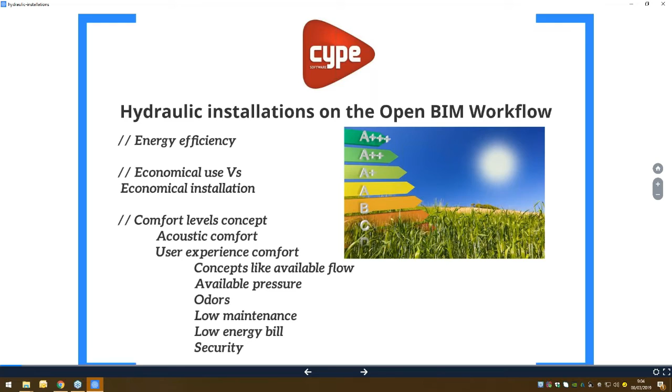CYPE is a Spanish company that has been developing technical software for architects, engineers, and construction professionals for well over 30 years.

The huge variety of programs and the disciplines they encompass are currently in use all over the world, with more than 70,000 users in over 60 countries. Amongst the clients are city councils, technical organizations, universities, and professional offices.

Starting in Europe with a focus in the south, CYPE has more than 40,000 clients in this region. It's very important to mention that the calculation conducted by CYPE software is certified by the governments of these countries, a certification which requires the results of our analysis to meet rigorous standards.

With more than 15,000 clients, CYPE is one of the most used software for structures, building services, and management in Latin America. We have more than 20 distributors selling our software around this region.

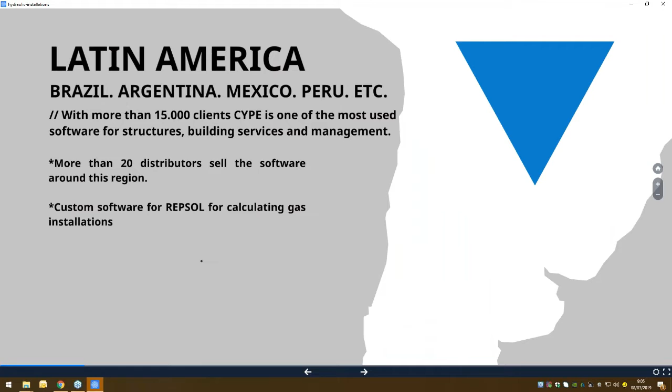In Africa, there is significant presence in the French and Portuguese-speaking countries, where we have seen a 250% increase in the last 4 years, and the development of the official software for thermal calculation and energy certification in Morocco.

And in the USA, India, and Australia, as well as many other countries, we are landing with our suites for efficiency calculation and structures, with our new headquarters opening in Atlanta, USA in 2016.

A principal component of the workflow is that all of the work is based on the open IFC file format, meaning that if CYPE was to cease existing, all the information created for your projects is free to be used with any other BIM modeling software.

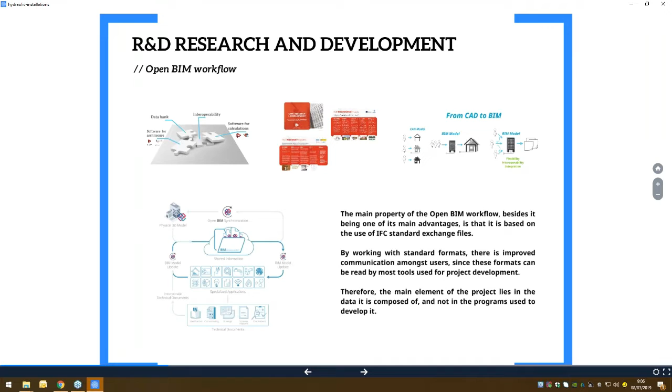So when we analyzed the construction industry, we noticed a lot of inefficiencies between the different gears that make up the industry. Due to the errors generated by the communication of work between different disciplines, projects are constantly over budget, as these errors originate from a fundamental lack of communication and are hard to predict. We want to remove the boundaries that exist between the professionals in construction, plumbing, HVAC, etc.

We spoke to the government, who routinely heard that a project would cost them $2 million and end up costing them double. If we can make the communication seamless, then we can remove a lot of the inefficiency that occurs in construction projects, and we can reduce the wide gap between projected construction budgets and those actually delivered after completion.

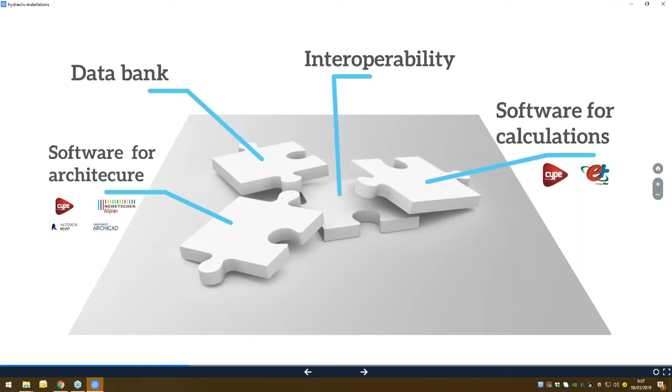So what have we done? We've conducted extensive research into how to remove these communication barriers. The international and national research projects which we have conducted in conjunction with manufacturers and researchers revealed a common solution.

The old method for construction projects using CAD models creates barriers between professionals and is the source of a lot of additional costs. Moving to a BIM model enables significantly improved communication between professionals. However, it does not take full advantage of the potential that exists in the technology. We have created a BIM workflow that takes full advantage of the technology to enable the simultaneous completion of work with improved flexibility, interoperability, and integration between different professionals.

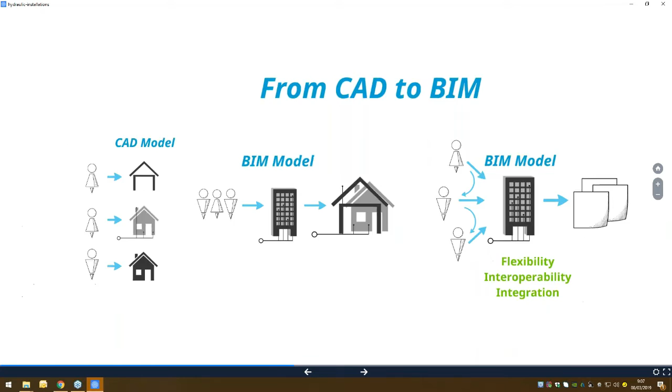Here I present the fundamental concept of the BIM workflow. This diagram depicts the iterative nature of a simultaneous workflow. As professionals take information, work, and export, it flows in a cycle that enables the seamless communication between all disciplines. I will explain this in context now.

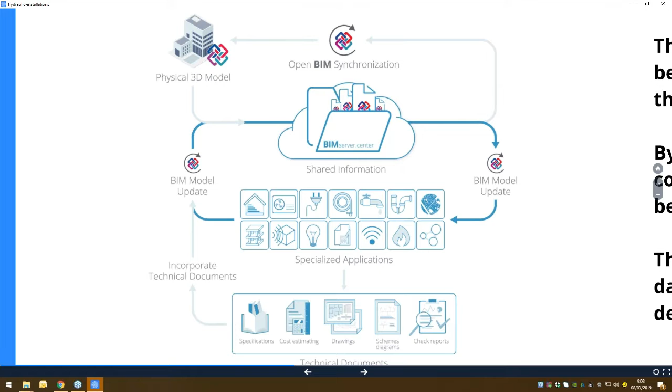So this is how the workflow works with the hydraulic suite, which I'll be explaining today. You can start in the top left corner with our architectural model, which loads directly into the BIMserver.center and begins the cycle. So if we move towards the BIMserver.center...

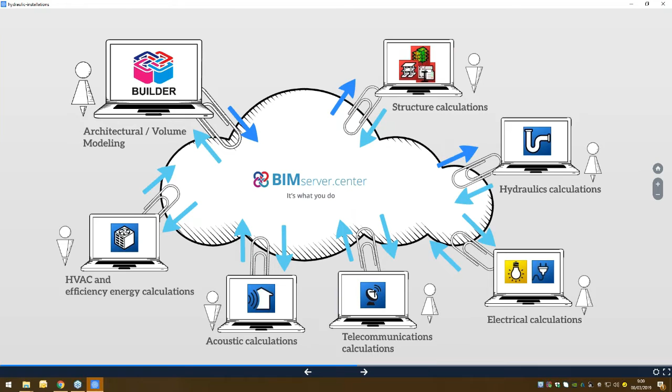Here's how the system works. Starting with the architectural model, each of the disciplines receives the BIM model and conducts their analysis, for structural analysis, electrical analysis, etc. Each of those feeds their results back into the BIMserver.center, where the BIM manager collates it all. If any changes are required, perhaps by the HVAC installation, the architect can adjust the building model, re-upload, and the changes are automatically updated for all the other disciplines. They simply recalculate and all the information is fed back into the program on the BIMserver.center.

So, to begin, the IFC Builder. If you aren't familiar with IFC Builder, it is a free CYPE application designed for the creation and maintenance of IFC building models. It's simple to use and integrated in our OpenBIM workflow.

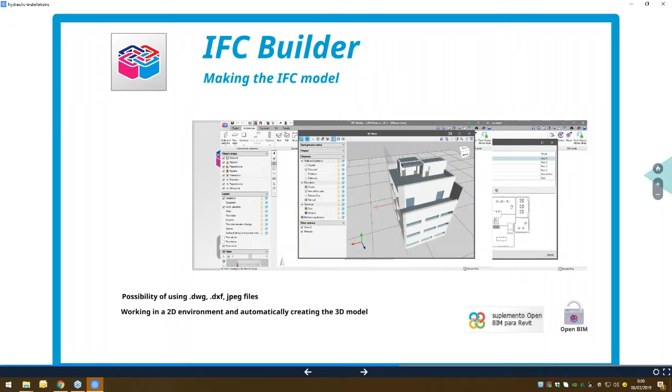Now we have our BIM model of an office space from IFC Builder. This is what we've created. So we can move on to the installation of our hydraulic suite.

So it follows along the workflow and moves into CYPEPLUMBIng Water Systems. So at this stage, I'm going to move to the software now. I'll exit the presentation.

Okay, so the first thing that we need to do when we're starting a new project is I'm going to go to the BIMserver.center, which is our platform for uploading BIM projects to the cloud.

From the platform, users can also download new software, they can access updates, they can collaborate with other professionals from a huge variety of disciplines, and they can find new projects that are related to and require work from their own discipline. So this is a connection tool for all the different suites of CYPE.

So it enables a connection between structural, hydraulic, electrical, telecommunications, HVAC, etc., all into one project. And it enables this simultaneous work of these different disciplines and the communication between all of the different elements, drastically reducing the time required for a project.

So to begin, I'm going to create a project. And I'm just going to call it demonstration, a seminar, be visible and open.

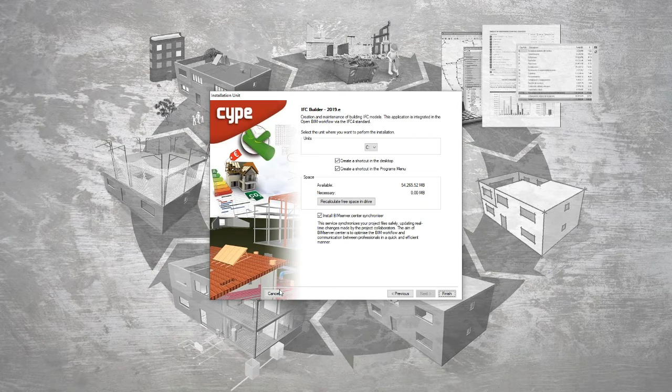And so this is a desktop application that ensures the files of the projects developed in the BIMserver.center are up to date. So it communicates between the BIMserver.center and the local machine that you're using, and it has to be running for the workflow to function. So make sure that you leave that box ticked.

So now we've installed our software, we can begin with IFC Builder. So as I said earlier, it's a free CYPE application designed for the creation and maintenance of IFC buildings.

For the sake of this demonstration, I'm going to use a pre-configured example file for an office so that we can save some time. However, through the program, it's possible to create thoroughly complex structures and export them to your project or to any BIM modeling software that you wish. So I will load offices.

So using the program, we have created a simple office building. You can see here, we can scroll through the floors.

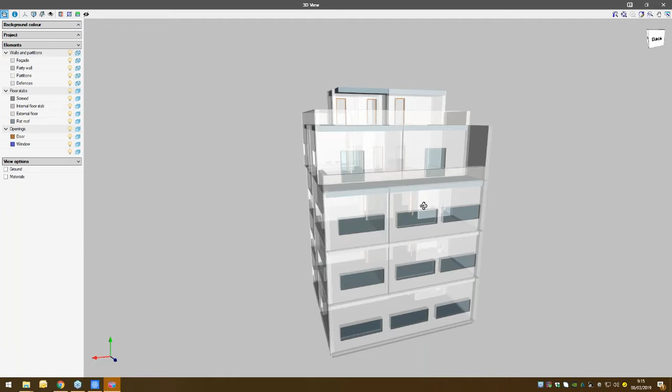So with a finished building model, I can export this. Oh sorry, just before I export, I'll show the 3D view of the building. Okay, so there you go. This is our simple office building, which we will be using today for the plumbing installation.

Okay, so I can export my building model. I select the project that I will associate it with, the demonstration project we just created. Accept, the name is fine. I'll accept.

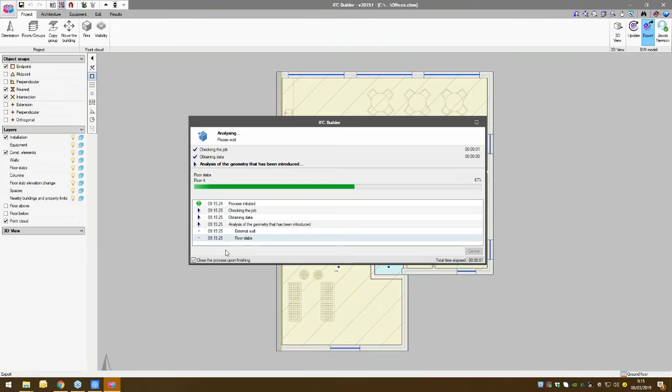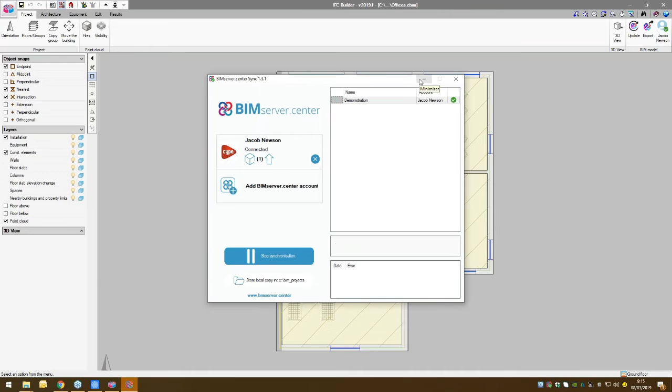So it'll just do a last check of the geometry of the building to make sure that there are no errors, and then it will export finished. And now at this stage, it's going to use the BIMserver.center synchronizer, and it's going to upload that to my project on the cloud. Okay, so finished uploading.

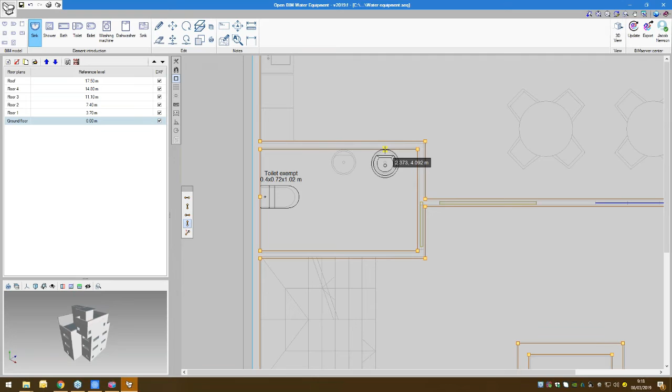So I'll start with the toilet. That's fine, place that there. And the sink, the 2 circular sinks. Okay, and to change the orientation, we just have the tools on the left. And I just left click to place those into the model.

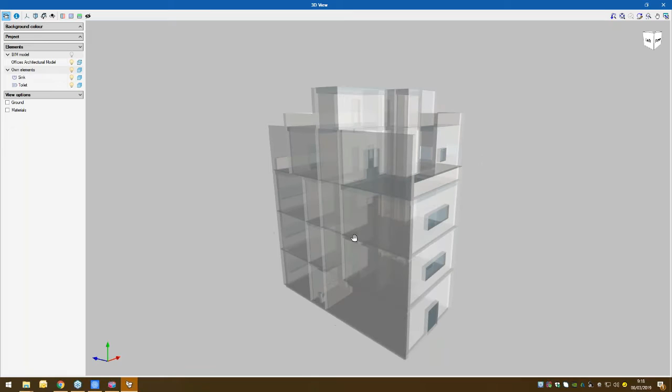Okay, and so just quickly, we can have a look at our 3D model. Okay, so if I go down to the ground floor bathroom, we now have a 3D model of the sinks and the toilet inside our BIM model.

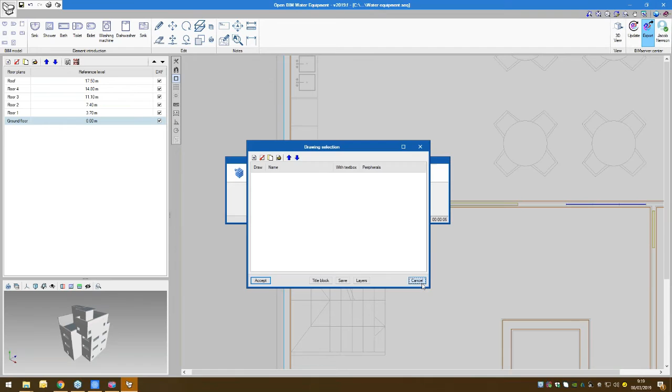So we can export this. That's all we needed to do in the water equipment program. Export, we don't need any drawings. Export finished, accept. It will load the file on the synchronizer.

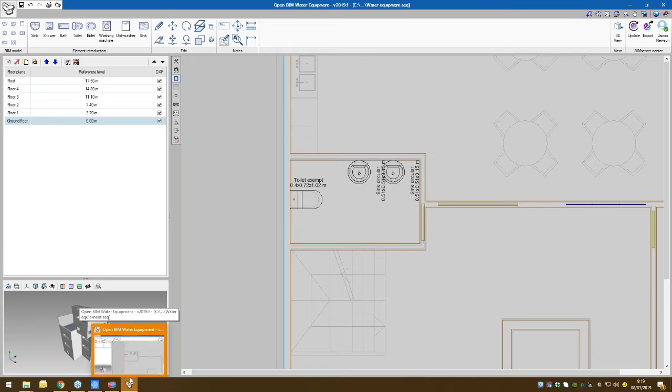And so you can see now how smooth this workflow is and will continue to be. We've got 2 programs open right now, editing our project, and I can move between them freely. I'm going to open up a 3rd program now, which will be the water systems.

So I'm signed in, new file, water supply. Select my project. All of the programs operate in a very similar way, so it should all be familiar. It's the same steps for each different program.

So here we have the importing stage. So we have our IFC building model, and now we also have the Open BIM water equipment. So I will import that as well.

Okay, so now we have the configuration. So again, we load the floors, we load the rooms, and here we have the configuration for the standards that we're going to use for water supply.

So as you can see on the right side, we have a number of flags to load pre-configured standards, such as the European Union, the British standards, we have America, etc. We also have tools for importing customized standards as well.

So if you create your own standards, your own checks for all the different appliances you're going to install, you can export that, save it for your next project. And for today, we're going to use the British standard. So I can import that and it will fill all my configuration settings automatically.

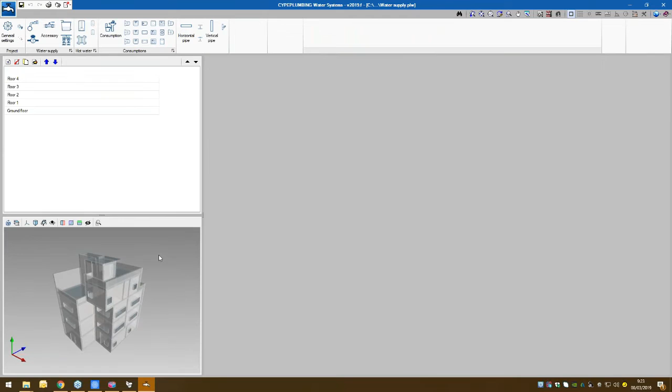When installing a water system or sanitary system, the installation always has a start point and an end point. So if we move to the ground floor, we can see here these are our endpoints. We need a start point and we need to connect it to our endpoint.

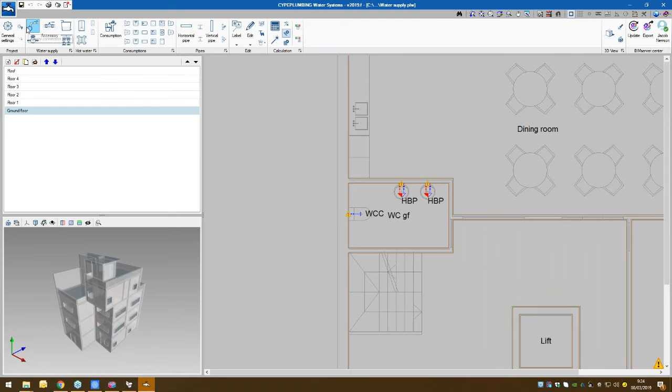Usually for water supply systems, your start point is going to be a supply connection given by this tool here, supply connection point. So I open this up.

You can see here we have the general data where you can input the temperature, the flow, the pressure. But you can see this lock tool here - when you see this symbol, it means that it isn't necessary for you to alter this variable, as the program has the ability to use context to assume that value.

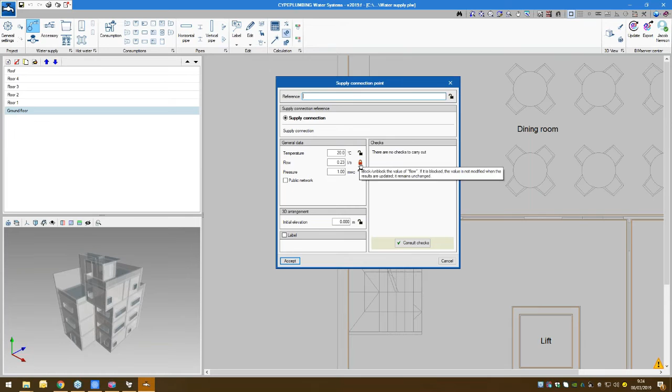If you would like to overwrite the program's assumption, you can input your own value, and then you must lock it in so the program doesn't override it. So we can leave all of this open and accept, and I will place my water supply connection point just down here.

Now we need to connect it with some pipes, so I'll use my horizontal pipes. Oh sorry, I just need to introduce thermal insulation for our pipes. Accept, okay.

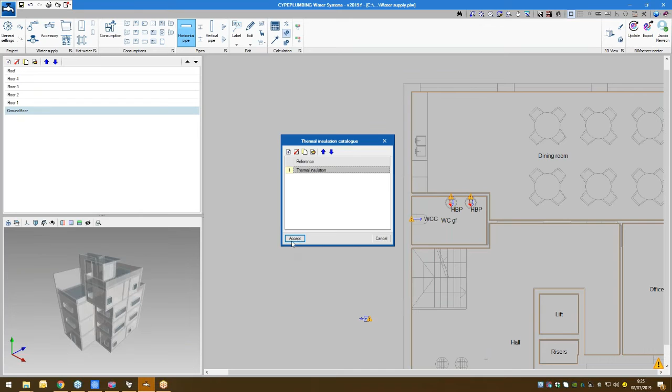For our horizontal pipes, here we can select cold water, hot water, the different types of pipes that we've loaded - we have 2 different horizontal pipes loaded. In the general data, again, you can see the locks, so we don't need to alter any of this data if we don't want, and we have options for flow.

Again, if you access the editing tools, you can see that all of this information will be automatically loaded by the program using context. So we can leave all of this, the program will assign it, and we can accept.

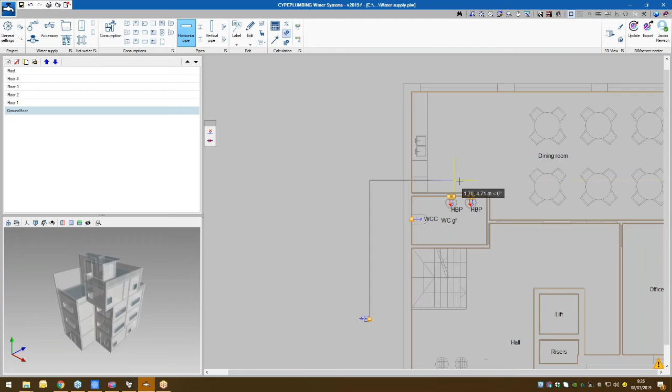Starting from our water supply connection point, I will go up like this, across, and I'm just going to connect to our cold water supply, like so. For today's demonstration, I'm not going to be connecting a hot water unit, just so we can keep this simple, but it functions the same.

And if you would like more information, again, please check the YouTube page because there's extensive videos explaining how to do so. Okay.

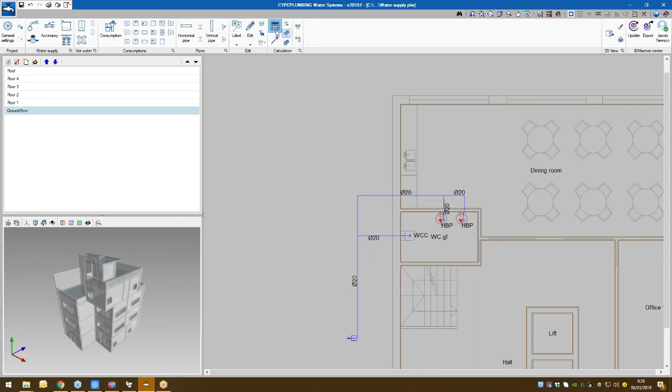So now that we have connected our pipe, we can see there's a number of checks in the window on the right, but we're going to run our calculation. If I go up here to my update results tool, you can see that we've hit a couple of errors. These two errors are simply for not connecting the hot water, which is fine, we can ignore those.

But if I go to this tool here, you can see that the velocity isn't reaching the required value. It's not falling within the range set by the British standard. And it's the same, I believe, for this pipe as well.

So now that we have these errors, there's one very useful tool in the program we can use, which is the dimensioner. It will take the information you've inputted and try to use it to recalibrate your installation. I'm going to use the manual one.

One sec, sorry. I believe we don't have - yes, so you can see the lowest pipe diameter that we have is a 20 millimeter diameter. So if I go into my general settings and my pipe catalog, I can manually introduce a smaller pipe that we will require for this installation.

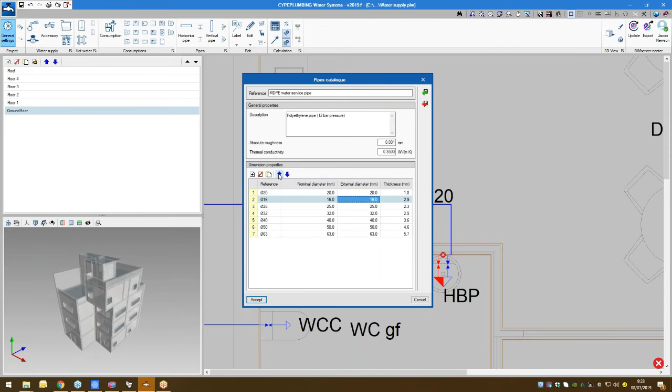For example, a 16 millimeter pipe instead of a 20 millimeter pipe. If I accept that, automatically dimension it, now it has gone into the library of pipes and found the best choice, which is now this smaller pipe, and the velocity is now adequate.

If I can do the same for this pipe - yes, so it has selected the smaller pipe.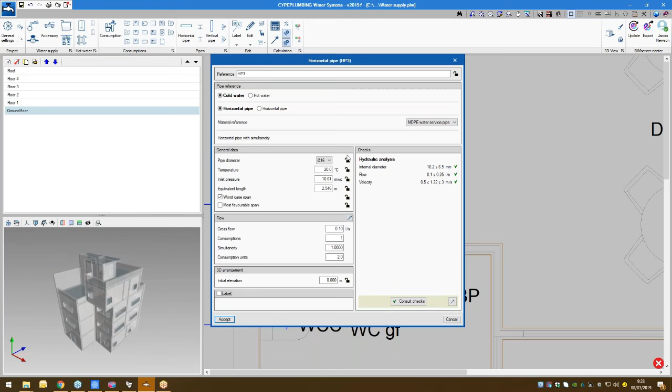Again, if I run the dimensioning tool here, this is a universal dimensioning tool. So this dimensioner will only activate for the individual pipe. But if I run - sorry, I just forgot to accept. Make sure you click accept, not cancel.

Okay, so if I run this tool, it will try to dimension the entire installation. In this case, it has changed this pipe from a 20 mil to a 16 mil, and it has upgraded this from a 20 mil to a 32 mil. It has done this according to the dimensioning settings we set in the beginning, which was for economical use, so it will try to design the most efficient system to minimize the requirements of our pump.

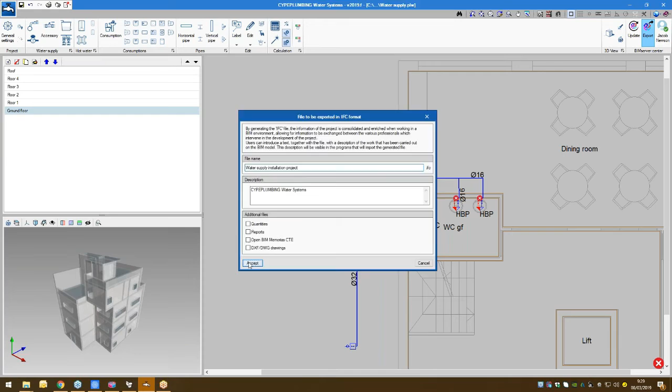Okay, so we have our water supply installation. We have a couple of tools for displaying the results of your installation, but I'll save those for once we've installed the sanitary system as well. So I'm going to export this water supply installation - accept, it's been exported. It will export to my project.

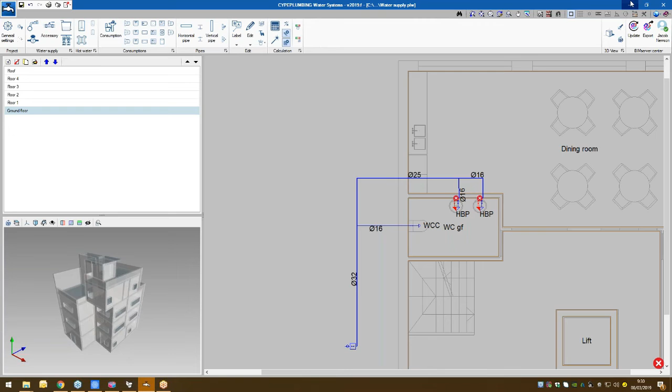Okay, so I will now open the CYPEPLUMBing Sanitary Systems. Again, this is going to be almost identical to the water supply systems. All of our programs are designed to run and operate in the same format, so it's intuitive to use.

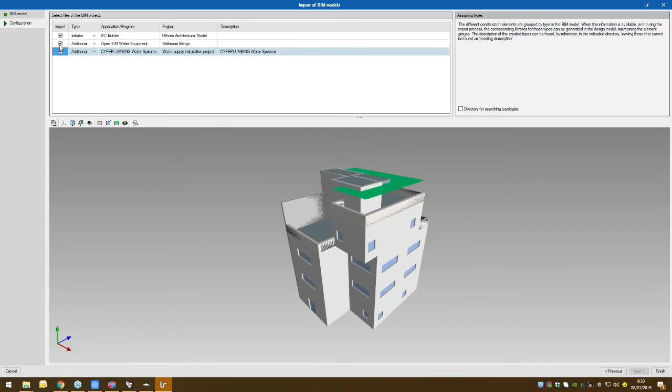So I'll select my project. It will load the information, and you can see we have the water equipment, and now we also have the water systems. So I'm going to import both - make sure you tick that to import them. Click finish.

We have our floors, our room types. Again, we have the configuration of the standards to use, so we're going to use the British Standard. Accept - show again. It will automatically load in the design and normative standards required.

Okay, so the next step, again, I just have to assign my toilet and my sinks, wash basin, that's fine. Okay, so these are the names as they're assigned in the British Standard. Finish. Accept.

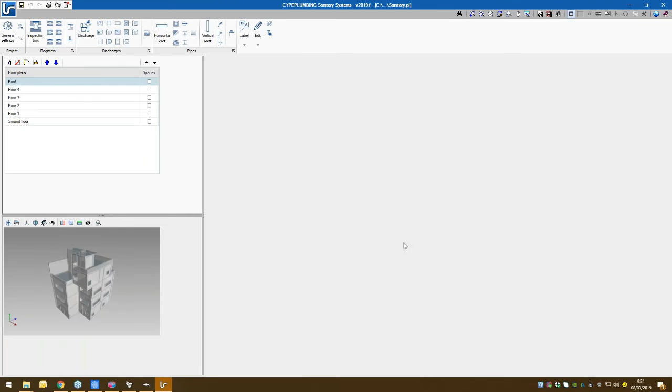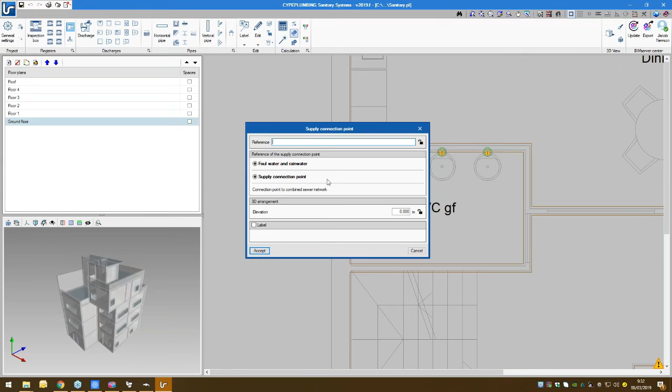Okay, you'll see the window looks very similar to CYPEPLUMBing Water Systems. Here we have our endpoints, or in this case, for the sanitary systems, these are our starting points. For our endpoint, we have the supply connection point. So I can accept, and I'll place our supply connection point just out here.

Again, we go to our horizontal pipes. It is an almost identical prompt as in water supply systems. You have your general data, your checks. Here you can select the pipe reference and the different types of pipes you would like to use. These come directly from the library that you've assigned.

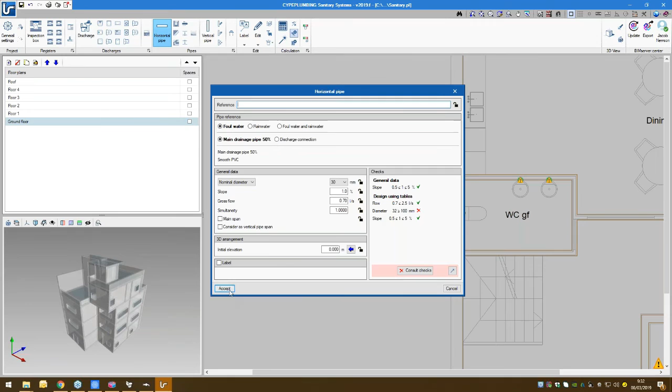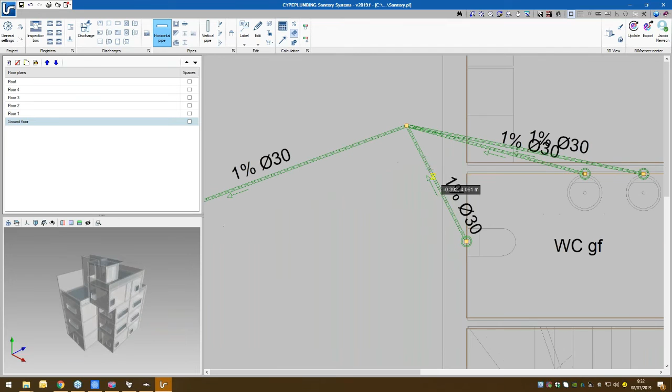So I can accept, and then starting from my starting point, I'm just going to draw a very basic installation like so. Obviously, you wouldn't normally design something like this - it's not very pretty, but for the sake of the demonstration, it fits. You can see here the direction of the flow using the arrows next to the pipes. I can right click to exit, and there's our installation.

Very simple. So if I run the calculation, you can see that there are errors. To check the errors, we can open up each individual pipe. According to the British standards, the diameter has to be greater than 32 mils.

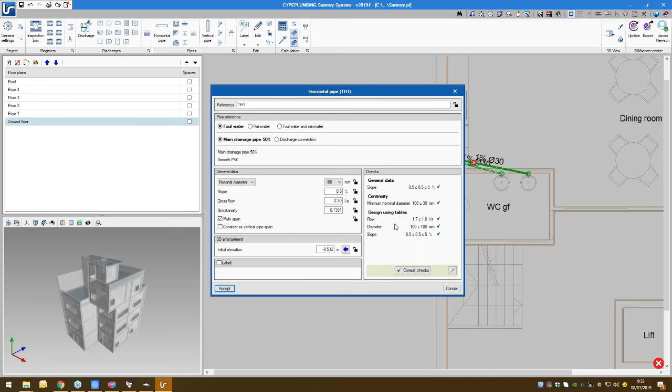So I can use my individual dimensioning tool again, and it will assign the best pipe to use, which in this case is exactly 100 mils. For the other pipes, I will use our universal dimensioning tool. Here you go - it has assigned all the pipes to be 100 mils.

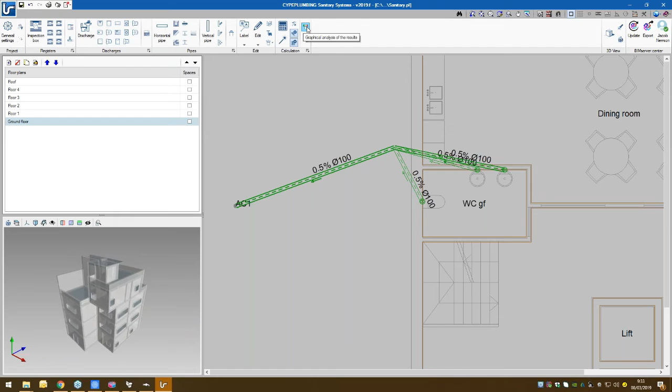Okay, and that's as simple as that. We have our sanitary installation. So some tools to display the results of the analysis. We have here the graphical analysis of the results, which can display a number of different results directly onto the project, such as flow, velocity, slope.

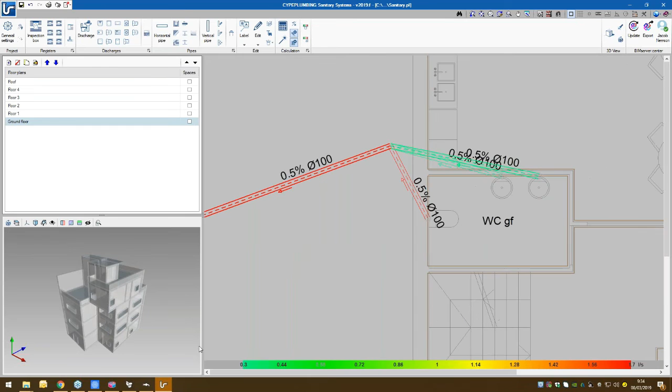For this demonstration, let's have a look at flow. We can see here we have our scale at the bottom, and it visually displays the results of the flow, which we can then set a range for if we'd like. For example, if we want to see between 1 and 2 liters a second, recalculate, and there we go.

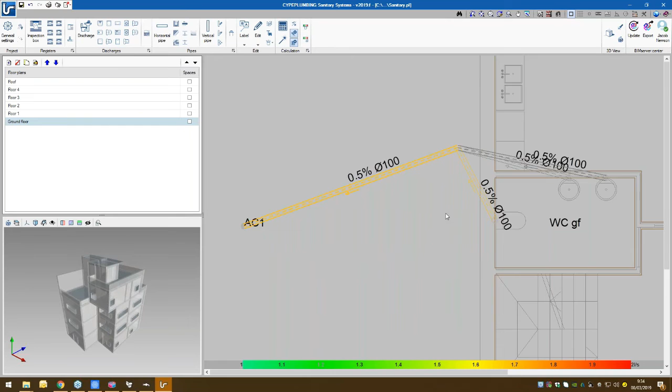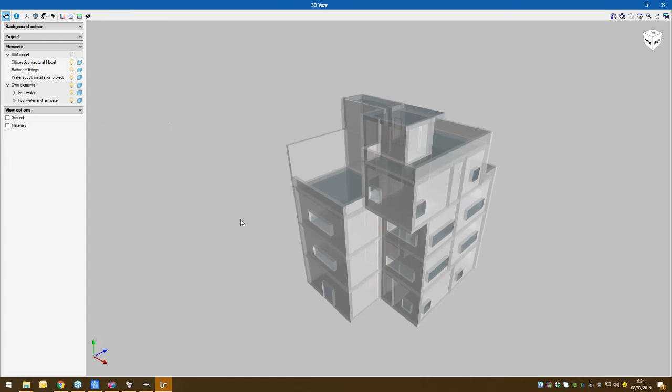Obviously, on an installation of this size, setting a range like this isn't as useful, but you can imagine for a full installation of an entire building, something like this is very useful to distinguish between the different levels of flow. If I open up our 3D view, the graphical analysis will carry over to the 3D view as well. Once I've finished this installation, I'm going to open up a finished example of this entire building completed, and that way it will demonstrate visually a little bit better the usefulness of this sort of graphical analysis. But yep, so that's the graphical analysis tools.

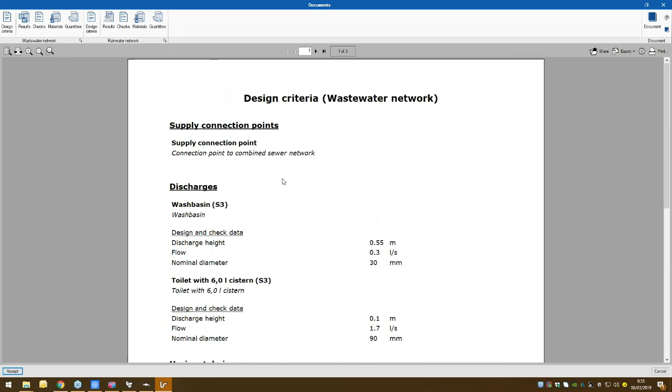The other tools for reporting your results, we have from the file button, reports and drawings. So if I open the reports, we have a number of different reports that are automatically generated, such as the design criteria, which lists all of the checks that have been run for your installation. We have results for the wastewater network and results for the rainwater network. Obviously, we don't have a rainwater network installed, but that's okay.

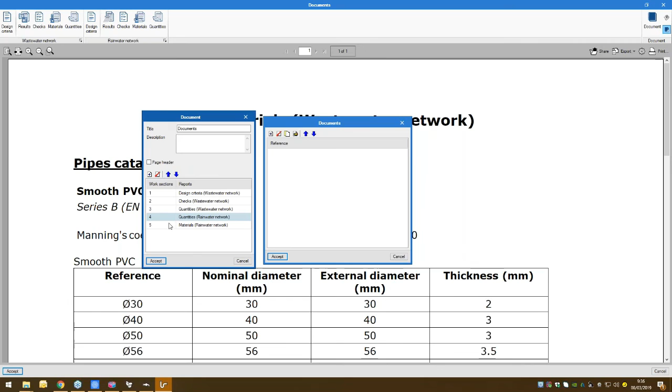A useful tool for collating all of these reports is our document tool on the right. If I create a new document list, I can select which reports I want to use, like so. Accept, I can alter the order. If I want to change the order, and accept. Now I can use this document button to generate my finished report, in a professional format, with all of the results that you've selected.

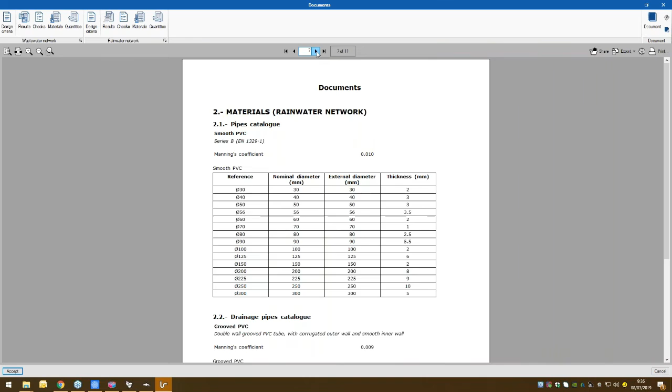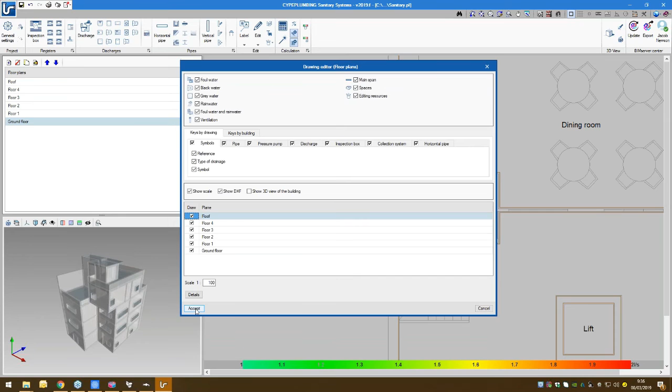And the other tool is the drawings tool. So if I click on drawings, open up new, here I have a number of tools for filtering what I would like to see in my engineering diagram. It's a mechanical design drawing. If I click accept and accept, it will automatically generate the floor plans with the sanitary installation included.

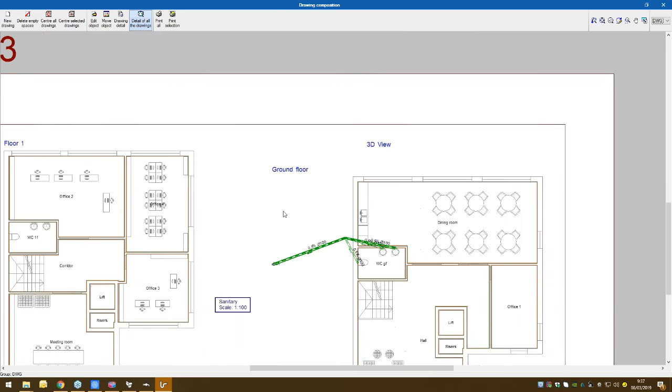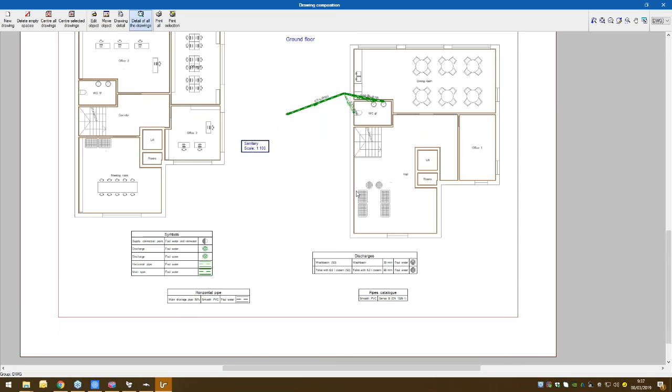So to see the details, we have a button here, detail of all the drawings. There's not a lot in our drawing, I should say, but you can see here is our pipe installation with everything - a very basic installation obviously, but it has every detail included, with automatically generated legends and scales, which are completely customizable. All of the settings to customize your drawing are included in the program.

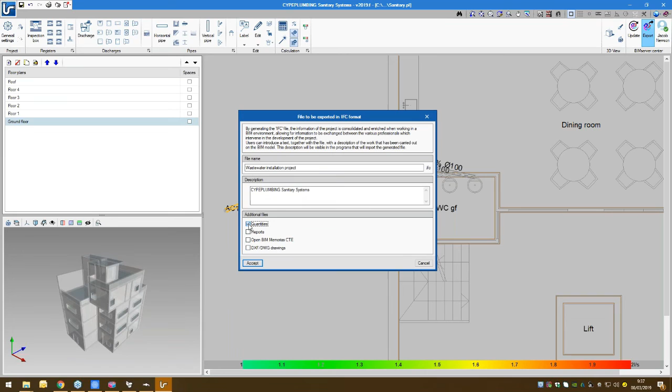Okay, so we have our installation, we've exported our results, our reports are all exported to our project. Let's export the installation to our project on the cloud. So here, if I would like to export my reports or my drawings, for this sake I'm just going to leave those out, but I will accept, and it's going to export my sanitary installation.

Okay, I think it has exported. So to check the export, we can go back to the BIMserver.center, move to my projects, demonstration.

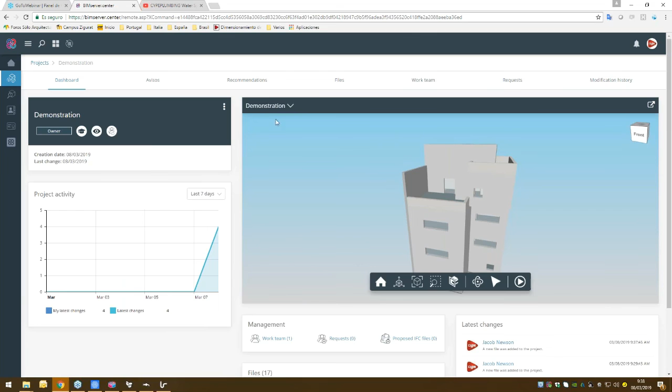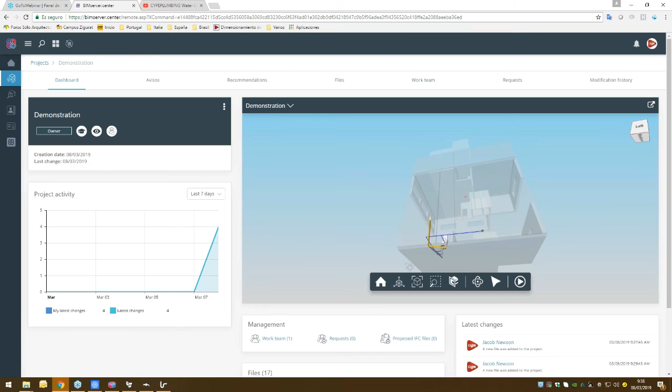So here we have all the tools for controlling your project, but I just want to see the 3D model. So I can make my architectural model transparent, sorry. And we can see here, we have the sanitary installation with the graphical analysis imposed, and we have our water supply installation as well, with the 3D models of our water equipment included. So everything has been exported successfully.

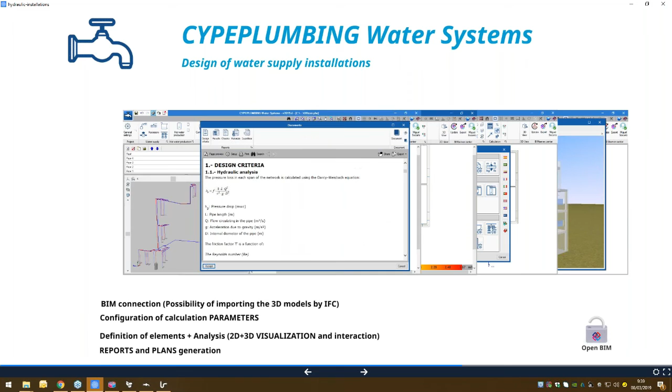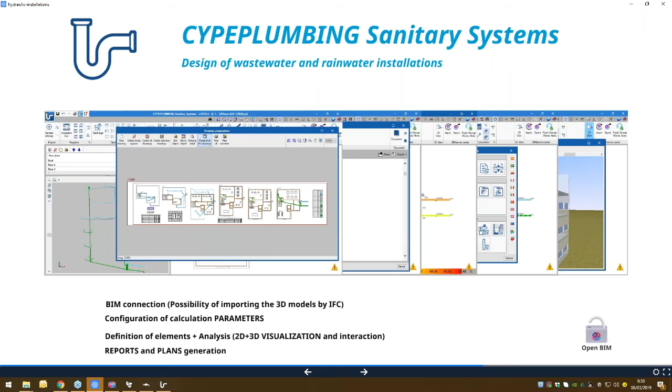At this stage, I'm just going to quickly go back to the presentation so we can finish this, and then I'll show you the finished product of what you can build with the hydraulic suite. So all of this data - we've gone through our water systems using our architectural model, configuring our standards, designing our installation, looking at the results, and exporting our reports and our drawings. It was the exact same workflow with the sanitary systems. It's a very simple workflow, very intuitive, and this moves right across the hydraulic suite. So we have CYPEPLUMBING solar systems and CYPEFire sprinklers, all operating in the exact same format.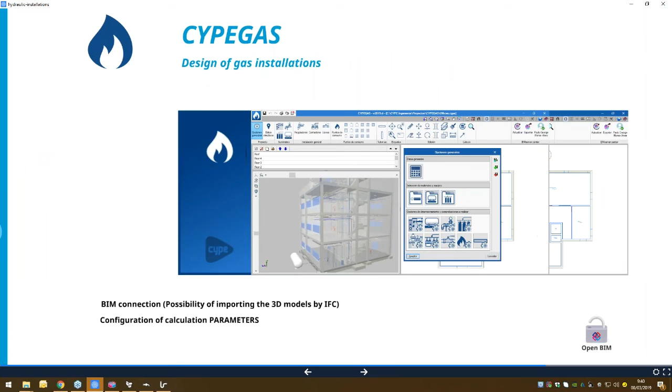And finally in the hydraulic suite, we have CYPEGAS. So we've made all of these different installations for our office project, and they've all been uploaded to the cloud. You can see it's all moving towards the left, updating our BIM model, and now it's moving into the BIMserver.center.

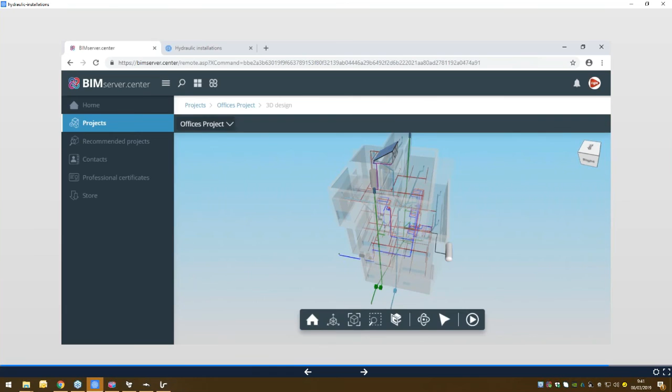We're here on our project. All the different installations are uploaded onto the exact same building model where all of the information is interacting and communicating. The BIM manager can see all the project data from each of the different disciplines working together, removing the barriers of communication between disciplines and enabling a simultaneous workflow, as all these different installations can be created at once. The final product is all the complete plans for every discipline involved in the construction project, all integrated with each other.

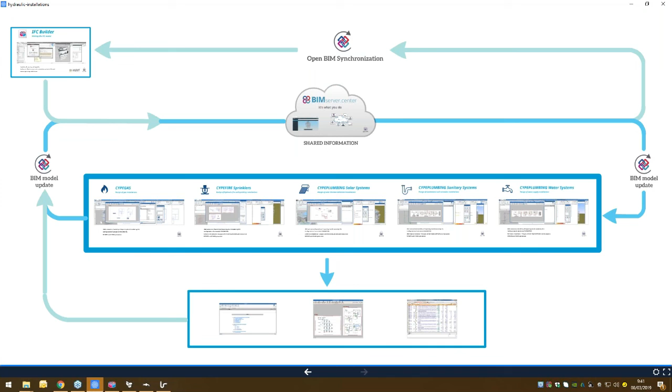All with the accompanying and required documentation, created to meet the building requirements of the code it belongs to. I hope this gives you a good idea of the benefits of this workflow system we've created for use with the CYPEPLUMBING software. I'll now show you what a finished product can look like when constructed through CYPEPLUMBING.

So if I open up the water supply systems, for example, and I load our finished office.

Sorry, I've got a couple of questions.

In regards to the two questions, these are a little bit specific for the demonstration today, but I will send you the answers directly. If anyone else is interested in that information, please let me know and I'll send you a detailed response.

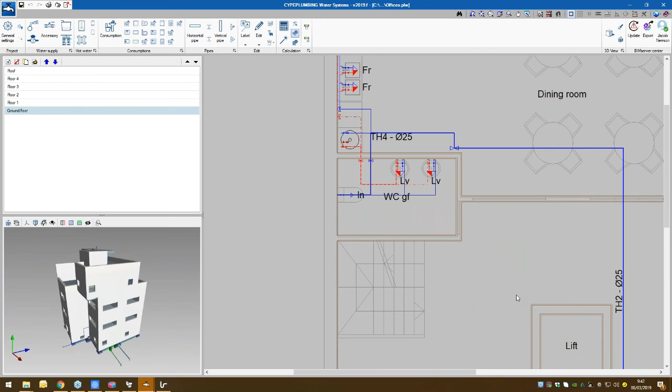Okay, so here we have our finished installation. As you can see, we've installed both cold and hot water on every floor in the building. Now if I move to the 3D view, we can see what a detailed installation looks like.

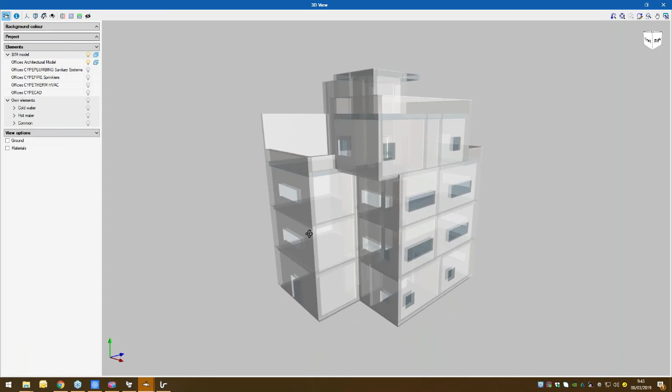I'm just going to slowly build up to this. So we begin with our office architectural model. We then move to water supply systems, where we install our cold water supply, our hot water unit, and connect the entire installation of the building.

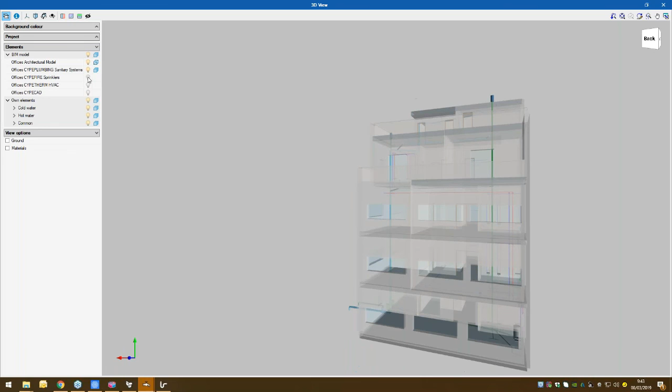Our sanitary system is then installed with both wastewater and rainwater installation. This building has also included CYPEFIRE sprinklers installation, CYPETHERM HVAC installation for air conditioning and heating, and the CYPECAD installation for structural analysis.

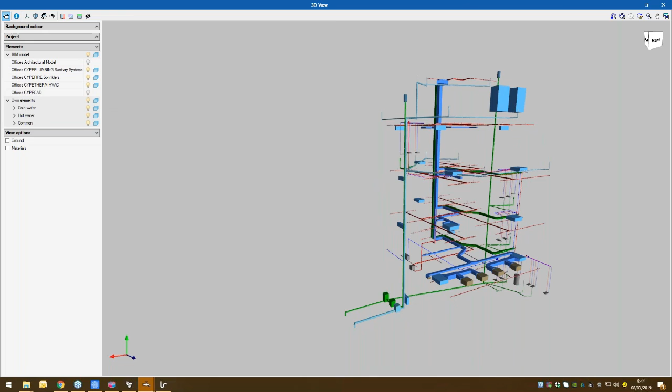So if I remove my architectural model, and I'll just get rid of CYPECAD, you can see all of these installations interacting successfully. When all this information is collated by the BIM manager, he can make necessary changes for each of the disciplines, and that information is uploaded back to the creators of each installation so they can make changes simultaneously. This communication is completely seamless.

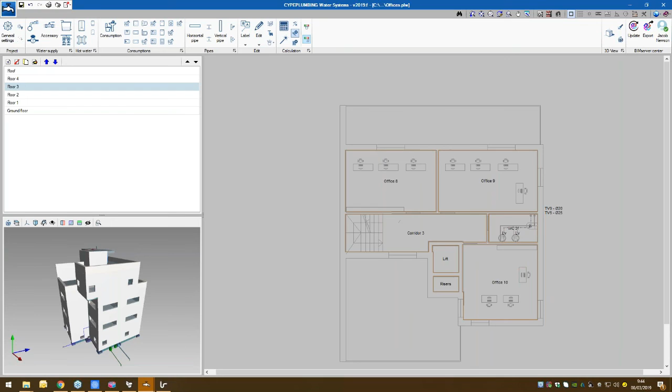So yes, this is our finished installation. For example, I'm just going to remove the other installations and I can run my graphical analysis of the flow. Let's try the graphical analysis of the velocity and calculate.

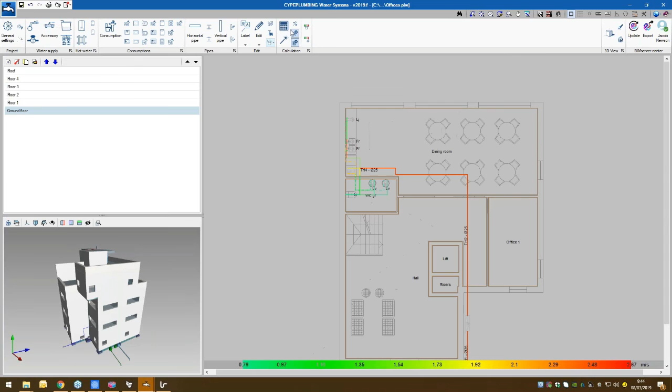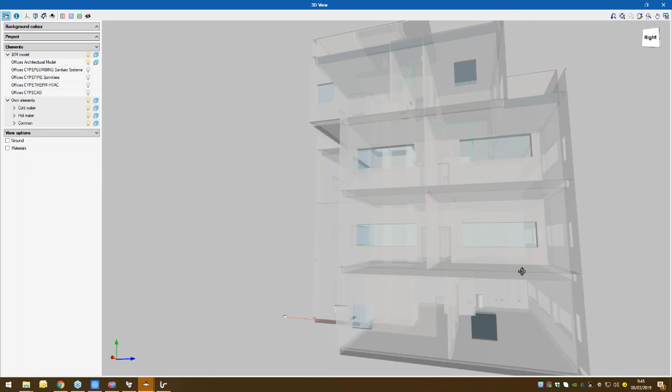Here's our graphical analysis of the velocity, which I can then display on our finished installation. And so here you have what I was talking about earlier — you can see the graphical analysis of the results of the velocity throughout our architectural model, and the difference between the ground floor and the higher floors of the building. This is a very useful tool for displaying your installation results graphically.

I hope you can see a little bit about how our workflow creates a system that gets as close as possible to removing miscommunication errors between the different disciplines that lead to unforeseen costs in projects. With that, I think we've reached the end of the demonstration. I hope you've enjoyed it and that you now understand a little about the potential application for this software. If you have any more questions, please send them through now.